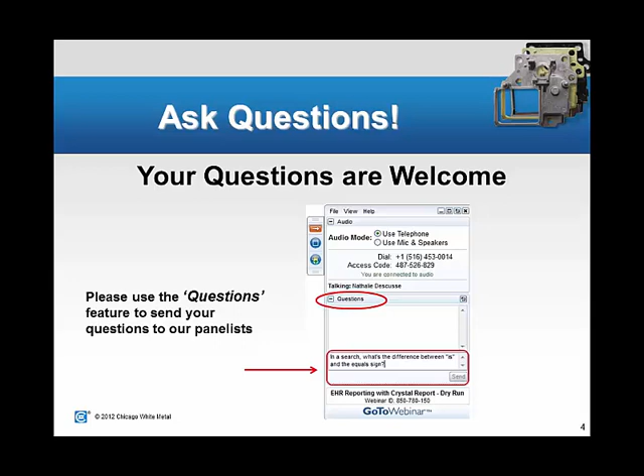So the agenda for today - based on the last webinar we had back in December, a common theme afterward was that a lot of people would like more information on what types of surface finishes are available for die casting. So that's the goal of today's agenda. We'll look at some factors to consider when selecting a finish, and what finish options are available. We won't go over everything - this would take a week to cover all the finishes out there - but we'll talk about some of the more common ones we use regularly, and you can see a comparison of them. We'll look at how part design features might affect the resulting finish, some potential quality issues that result from various finish options, and how Chicago White Metal can help. If there are questions about a type of finish or what might be suitable for your application, let us know, and we'll do our best to help walk you through the best option.

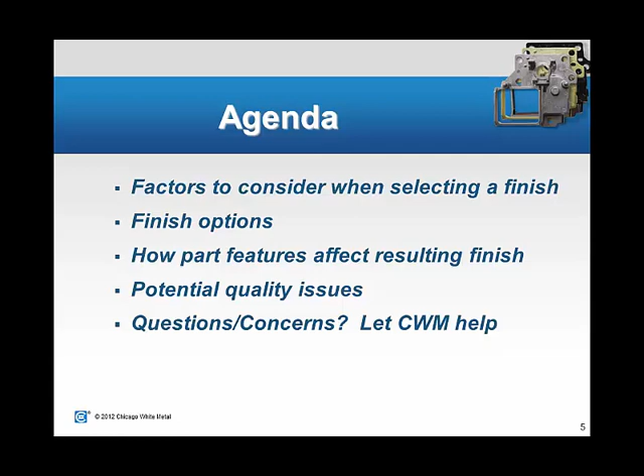Some factors to consider when looking at a finish for a die casting - we have a little catchphrase: start with the finish in mind. Yes, that's a little cheesy, but it's accurate. It's best if we know as much about the finish requirements of a part at the beginning of a project as we can. Many times we'll get into a project and the finish requirements get pushed out, and by the time you're tooled up and ready to go, requirements come in - maybe there's a gate where you wanted a high quality surface - and that's hard to work around when the tool's already built and you're already making parts.

So as much as we know and can work with you ahead of time, it helps the end product that much more. So what are the factors to consider? Cosmetic appearance - is there a specific look you're trying to achieve with your part? Is there a color, a texture, what kind of appearance are you looking for? Part ergonomics - is there a touch factor to your part? Do you need fingerprint resistant coating, a certain amount of texture with your coating? That's another factor to consider. Are there specific corrosion requirements for your application? As we go along, die castings as cast have a certain amount of corrosion protection.

And maybe that is great for some people's applications, but other ones need a higher or maybe a super high level of corrosion resistance. So if you know what your requirements are, let us know, and we can help steer you in a direction. Is there electromagnetic interference or RFI shielding requirements for your application? There are different coating and finish options that help with that. Is your part require a pressure tightness? Is it used as a pressure vessel or going to have a leak test requirement? That's something to consider and let your die caster know as much of that as you can.

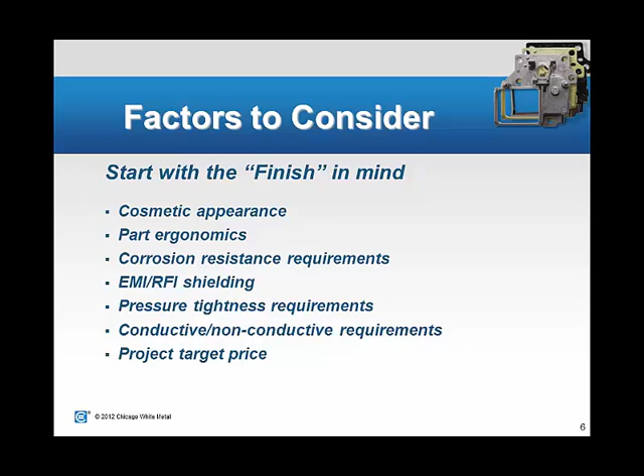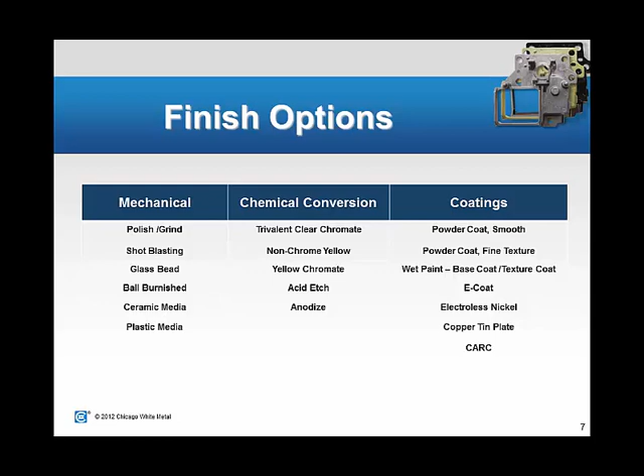Here is just a sampling of the finishes that are available. We try to break it down into categories. We have a mechanical category where parts are vibratory deburred, shot blast, or ball burnished, that type of thing, and we'll cover most of those. Chemical conversion coating, where parts are put in a plating bath and the surface of the die casting is actually converted - the alloy and chemical composition of the surface is converted to make an anodized part or a trivalent clear chromate, that type of thing. We'll talk about those. And what we call final coatings - things typically considered to be a highly cosmetic look, from powder coats to wet paint, all the way through. We don't talk about all these listed here, we just wanted to give a sampling of what's out there. And again, there's many, many more.

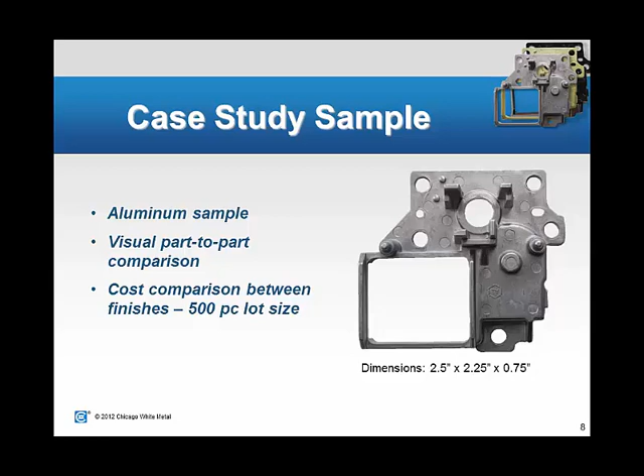One other thing to note is we based all of our pricing in this presentation on a 500-piece lot size. So you'll see in here where there's times we'll say 'with setup, cost with setup.' A larger lot size might end up reducing the overall cost per part, but we tried to keep it consistent - a 500-piece lot size was used in the pricing for all the examples coming up.

So the first section we'll talk about is mechanical finishes. That covers shot blasting, ceramic media, plastic media, ball burnishing, glass bead blasting, and polish and grinding. One of the benefits of all these coatings is that it removes the majority of the flash from an as-cast part - all of these do a great job at that. They also remove any surface imperfections of the casting, so flow marks and swirls that might visually not be what you want - these will even out the surface and give it a better appearance.

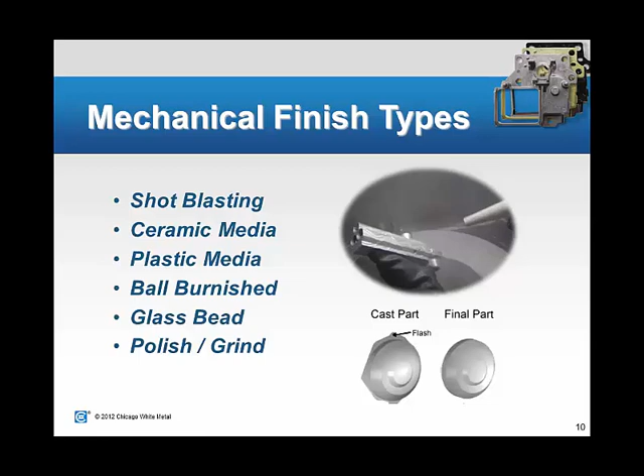These also do a good job of preparation for some of the following coatings that are going to go on. So if the part's going to get a wet paint or powder coat as a final coating, shot blasting or some of the other vibratory deburring operations do a good job of prepping the surface, roughing it up a little bit so that the final coating adheres better.

So here's the first example of a type of mechanical finish: shot blasting. The part pictured here was actually performed using the Wheelabrator process, which should be familiar to a lot of people. It was done with steel shot, and because this part was aluminum, we could do that. We wouldn't recommend steel shot for magnesium or zinc alloys, but this is what we did for aluminum.

So we would consider this a mechanical finish for a non-cosmetic part. It's going to give a nice, even, uniform coverage at a low cost, but we would not consider this a highly cosmetic look. It does help cover imperfections in the surface that I mentioned. Potentially, depending on how aggressive the shot is to the part, you may have scratching or blistering that occurs during the process, so it's something to keep in mind, and your die caster should help control that.

The steel shot is relatively aggressive to the part, so with really tight tolerance features, you may have some issues keeping that tolerance after the process, so that's something to keep in mind. There are various media available. The example shown here was processed with steel shot for the aluminum part, but there are different media options available that will allow us to process magnesium or zinc as well. The cost for this process, at a 500-piece batch size, was 8 cents, with the steel media. That's the bottom line, the baseline that we start with.

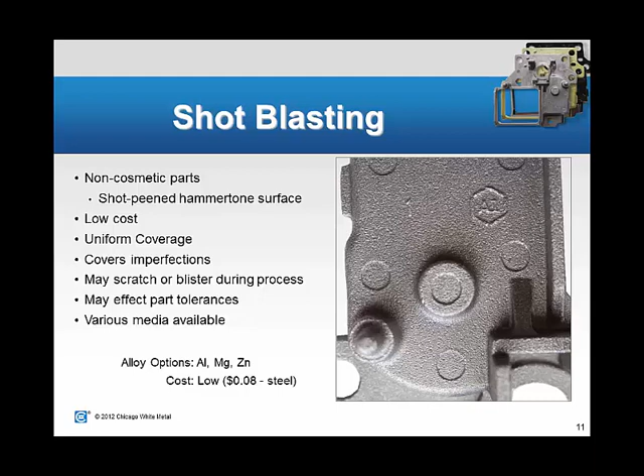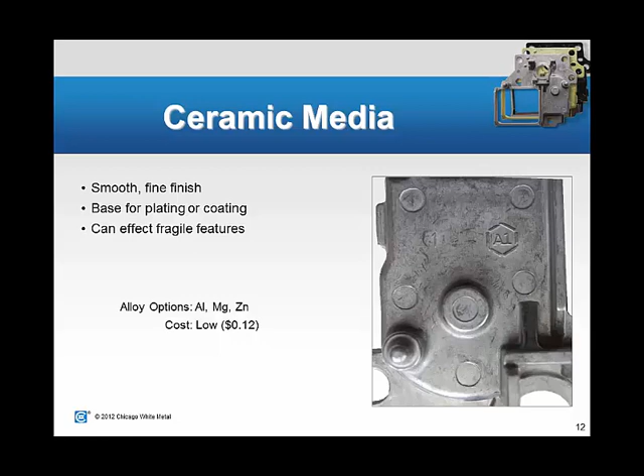Ceramic media. This is a vibratory deburr process where parts are put in bulk into a tub or a large bowl and then vibrated. The interaction between the media and the part is what creates the surface. The ceramic provides a smooth, fine finish, and again it's a very good base for plating or coatings that come later. The ceramic, just like the previous process, can be aggressive to fragile features, so it's something to keep in mind. This can be done with all 3 alloy types, aluminum, magnesium, and zinc, at about a 12-cent cost.

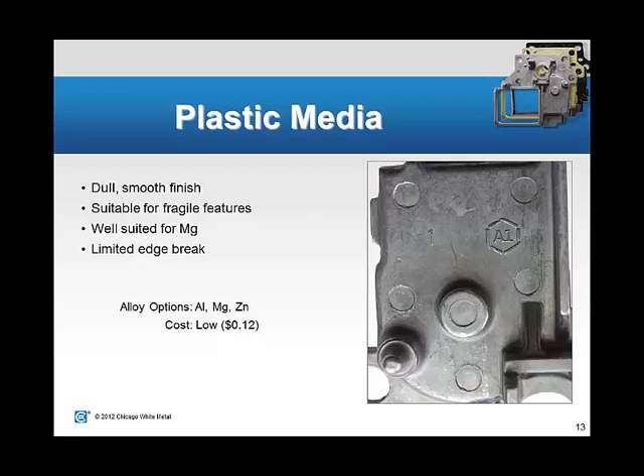The next one we show is plastic media. This is done in the same process, but the media used here is small plastic. The media comes in different sizes and shapes, so you could have balls, cylinders, or triangles. It varies depending on the type of finish you're looking for, and each type gives a different look. This provides a dull, smooth finish. The plastic media is not very aggressive to the part, so it is suitable for fragile features, as well as magnesium, which needs to be handled a little more gently, so plastic is good for that. Because it's not as aggressive, there is limited edge break, so some of the edges and features of the part that require a more significant edge break, plastic media will not give that. Just something to keep in mind. Again, all 3 alloy options are available to be processed this way, again at a 12-cent cost.

Ball burnishing is a very low-budget option for a nice mirror shine. In this process, the metal is actually being worked to get the desired appearance. It definitely helps remove burrs from the part. It does have the highest cost media; there's stainless steel media used in this, and it is a high-cost media. Again, all 3 alloy types are available, and this cost is 30 cents.

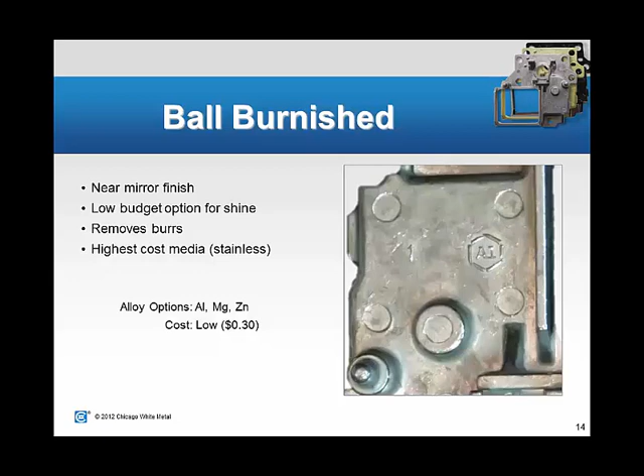Glass bead is another shot blasting type of process. It provides a very smooth, uniform finish and is a good base for final coatings that come later. It is more of a manual process; many times this is done part by part, so the labor content is slightly higher. Because of that, you will have some varied part-to-part and lot-to-lot matching issues potentially, so next time you run it, it may not look exactly like it did before. One of the reasons is the media wears very rapidly, so depending on if it's new media or old media, or where it is in the cycle, the look will come out a little different. All 3 alloy options are available with this process, and we call this a medium cost.

The previous ones were all in our low category. This is the first one for a medium cost, 35 cents.

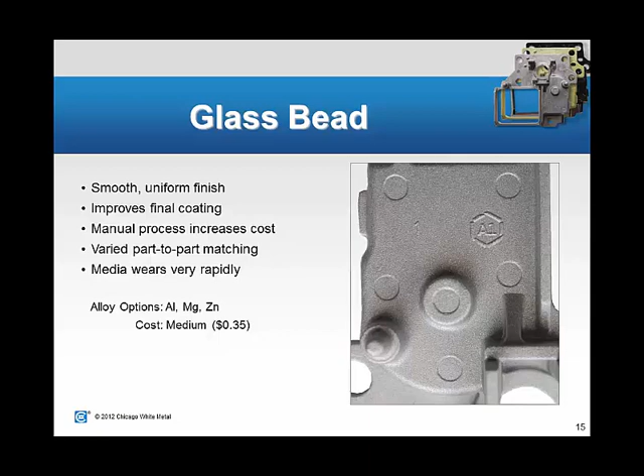Polished parting line - if you look at the image, this is actually the same part, the part below showing mouse marks. You can see on this part a rough edge in this area. That's the gate vestige left over after a part is cast and then die trimmed. You'll have a rough edge where the gate metal flowed into the part, or overflows, or other tooling configurations where metal comes in or out of the part.

For a lot of people, the as-trimmed look is fine, it's not a problem. But if it's a highly cosmetic finish, many times that's not acceptable. Even if you powder coat or wet paint on top of this, the rough area will still show through. It's not like it'll cover up with powder coat or wet paint - it'll still show.

So what we do is, again this is a more manual process, we actually polish the parting line, and the result of that is what's above. The above image shows what happens when you remove that gate vestige, and once a powder or wet paint or another cosmetic finish gets applied, it looks fantastic. You could never tell that there was a gate or any other tooling remnant visible. Again, we would consider this for cosmetic parts.

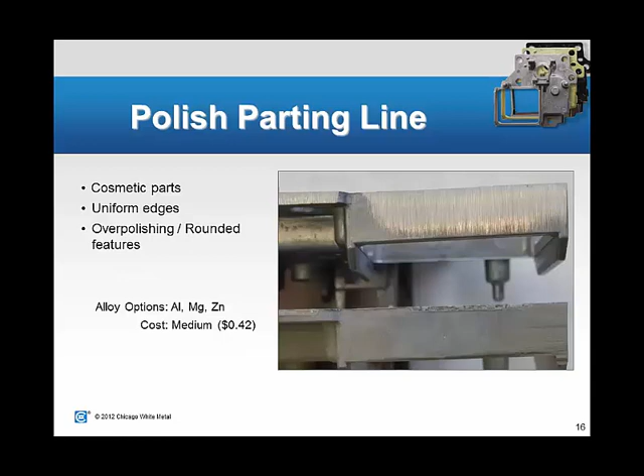We'll now look at some chemical finishes - this is the second category that we looked at. The types we'll cover today are trivalent clear chromate, yellow chromate, anodize, and a non-chrome yellow.

If you see the picture, all these processes are processed in a tank. The parts are either rack plated or potentially bulk plated, processed in a basket and then hung on the racks, which you can sort of make out in the image, and then put through a variety of different baths to achieve the final coating we're trying to do here.

In all of these, like I mentioned before, the chemical makeup of the surface of the die casting is actually being changed. So one of the benefits of these coatings is that there's really no added thickness to the part. So for parts with complex features or tight tolerances, there's basically zero added thickness, which is a good side effect for this type of finish.

All these finishes provide additional corrosion resistance over a raw casting. They also, like the previous batch of options, provide proper surface preparation for any coatings that come after it. Again, we would consider this not a cosmetic finish, but it can be used as a final coating if that's all that's required. Many of our customers do use these options as a final finish.

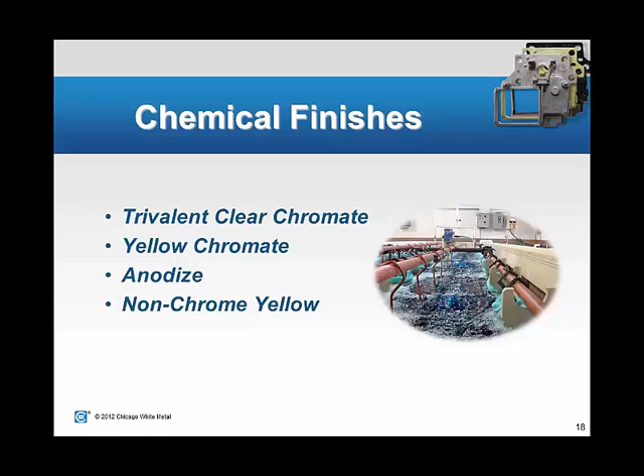The first option we look at is trivalent clear chromate. It has a dull gray appearance, can have a bluish tint at times. It's very inconsistent from batch to batch exactly how the parts come out and look. It does provide excellent coating adhesion for the following finishes that might be applied to this part.

The two things to consider when looking at pretty much all of these bath-plated processes are chromate entrapment and a white powdery residue that can be an issue if the part has blind holes. You can imagine if a part is racked and then lowered into a bath, sometimes blind holes have a hard time receiving the liquid into them, and then a hard time getting that liquid back out. So it's just something to consider. Proper rinsing of the parts after the process will typically alleviate that, but it's just something to consider.

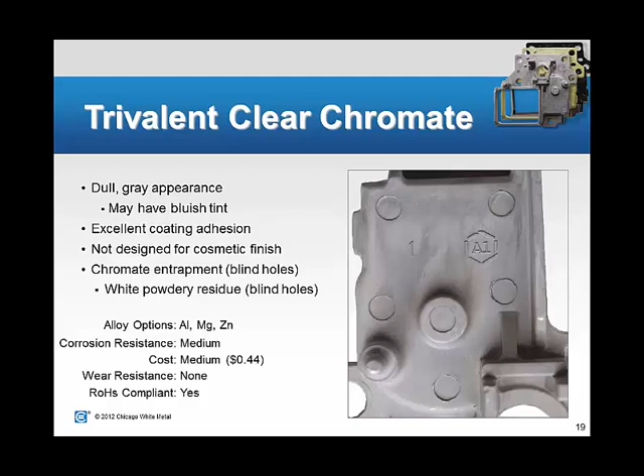Again, all three alloy options are available for this trivalent clear chromate. It provides medium corrosion resistance - this is a relative scale on top of the corrosion resistance that an as-cast part has, so this provides an extra layer, and we would call that medium corrosion resistance. The cost of this is about 44 cents per part. It does not add any wear resistance to the casting, and it is RoHS compliant, which I know is important for many of our customers when looking at reduction of hazardous substances. This complies with that.

The next one we'll look at is a yellow chromate, again processed very similar way. This again varies in color from part to part, batch to batch. We say yellow chromate, but sometimes you'd be hard-pressed to call it yellow. It does improve the adhesion of final finish, and the two blind hole issues that we talked about with the previous slide apply to this as well. Again, all three alloy options, medium corrosion resistance, 44-cent cost, and this one is not RoHS compliant. So this is one to keep in mind with that.

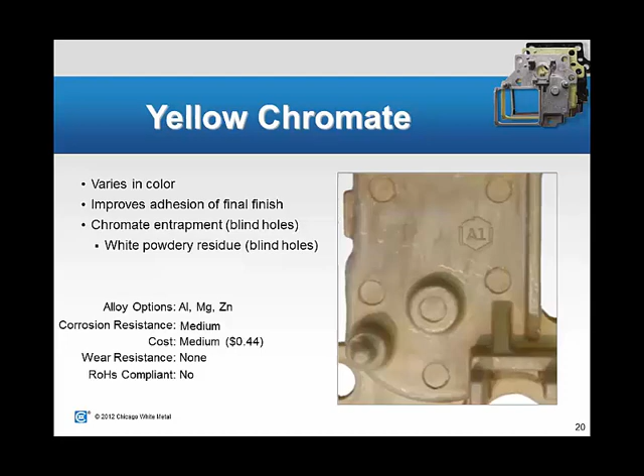If we look at anodizing for die casting, it provides a very low gloss, sometimes matte finish. It comes in clear or black when looking at processing for a die casting. A very non-uniform finish—we would not consider this a cosmetic look. It is very good for tight tolerances because of the minimal thickness applied. It is non-conductive, and again, low film thickness. The options available are aluminum and magnesium. We don't anodize zinc. It offers a medium level of corrosion resistance.

47-cent cost. It does provide some extra wear resistance, so we call that medium, and it is RoHS compliant. There are typically some sealers that are applied to anodizing as a follow-up process. Some of those are not RoHS compliant, so those are things to keep in mind. You just want to make sure that the sealer being used either is or is not what you're looking for.

I'm looking at the questions, and it looks like there's a few coming in about why anodizing on die castings did not look like the anodizing on a machined 6061. That's a very good question, we get that a lot. A lot of people are used to seeing anodizing on machine parts with 6061 or extruded parts, and the finish of an anodized part looking great—nice, shiny, consistent, uniform finish. And then when they see an anodized die casting, it looks nothing like it. What happens is, in the other processes I mentioned—extrusion and 6061 machining or other alloys and machining—those are almost 100% aluminum alloys. The die cast alloy that's being used, 380, 383, 390, 360, all of those, has enough other alloys or chemicals in it to prevent the nice shiny finish that you get with an anodize, especially the presence of silicon. That actually is what's preventing the nice consistent finish.

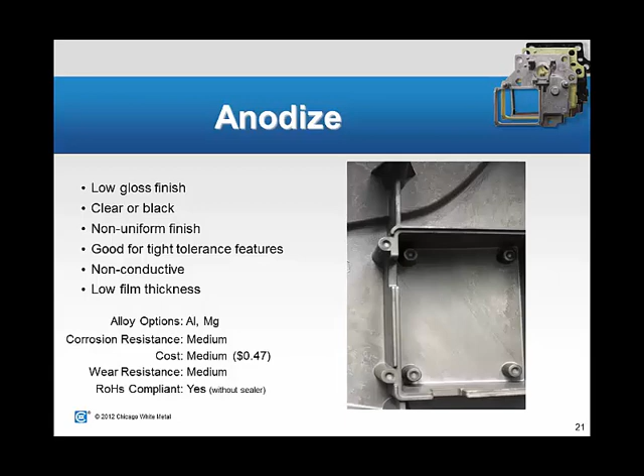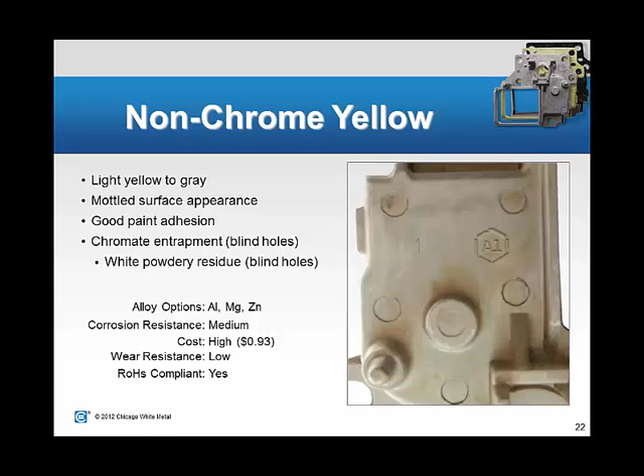The last one in this section is non-chrome yellow. It gives a light gray or yellow appearance, and it can look mottled at times. Again, good for paint adhesion, and the two same concerns with blind holes are in effect for this option as well. All three alloy types are available. Again, medium corrosion resistance, and we would consider this more on the high side, especially of this category of finish, at 93 cents each. It provides a low level of wear resistance, and it is RoHS compliant.

This slide just gives a summary of the three types of chromates. We don't have anodize in here, but it does show visually the differences between the three. It's a little hard to see some of the differences, but you can see the varying shades of appearance that you'll get.

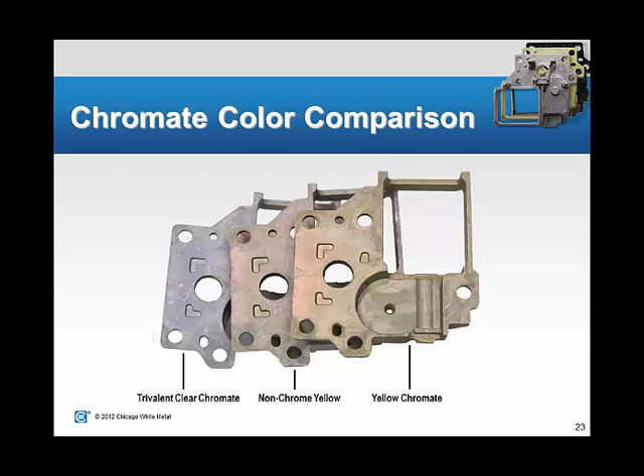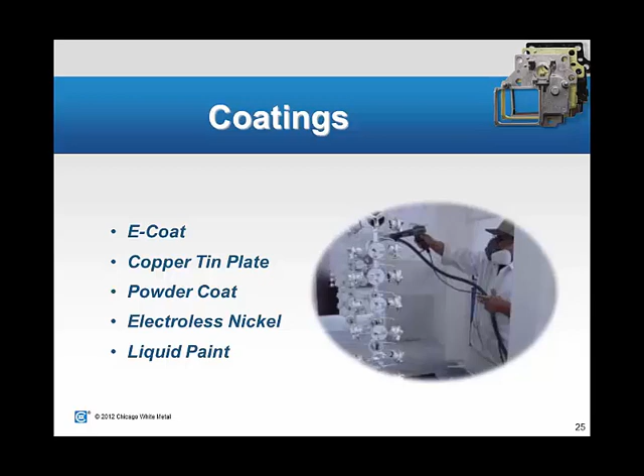Okay, we'll look at the third category of finishes that we talk about, which is coatings, or the final coatings, however you want to say it. These are the options we'll look at: E-coat, copper tin plate, varying types of powder coating, electroless nickel, and liquid or wet paint. These are what we would consider cosmetic coatings, so these are going to give a very high level of cosmetic look to the part.

E-coat is the first one we'll talk about. It provides a black glossy finish—black is overwhelmingly the choice of color for this. There are some other colors being developed for die casting, but they're used very, very little. So 99.9% of the time, you get a black part if you want E-coat. But it does provide a very consistent thickness at 1/1000th or a little under 1/1000th of an inch. Very good for complex designs and part features. This is an insulating finish, so if you're looking for a finish to go on a heat sink or something else, this is probably not what you're going to want, because it would not allow the heat to escape.

The one concern for E-coating, or one of the major concerns, is air pockets. Again, this is done in a bath process, so there is a potential for air pockets to be entrapped underneath the E-coat finish. This process is good for all 3 alloy types: aluminum, mag, and zinc. Provides a very high level of corrosion resistance. Medium cost at 44 cents. Medium level of wear resistance, and it is RoHS compliant.

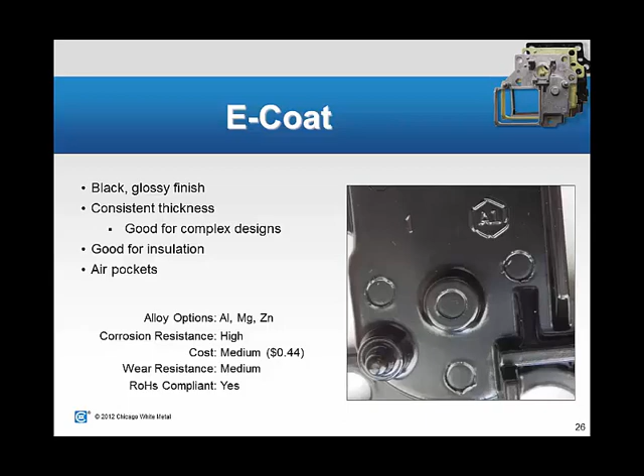The next option we'll look at is copper tin plating. Provides a high glossy finish, and it is solderable. So if it's an application where you have an electrical connector or something else that needs soldering to other parts, this is a very good option. Provides a very uniform finish, good for tight tolerance features. It's a very, very thin layer of thickness that goes onto this.

This is a conductive coating, and it does provide for very good EMI shielding. So if you have parts that are going to act as a device for electronics, this is a good option for protecting the electronics from EMI. We look at aluminum and zinc for this plating type, not magnesium. Provides a medium level of corrosion resistance, medium cost at 70 cents, medium wear resistance, and again, it is RoHS compliant.

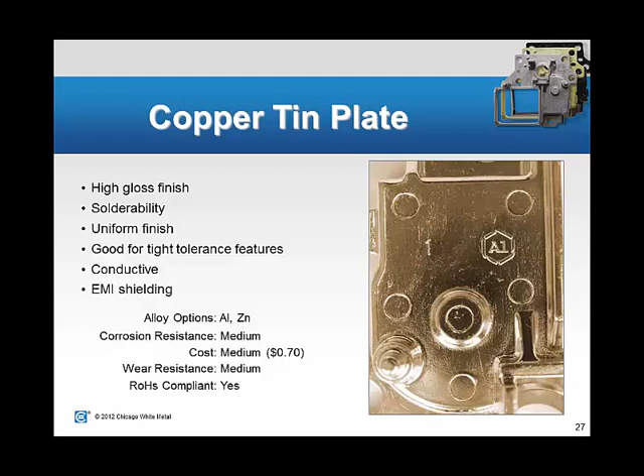Powder coating, that's a very common final finish that we get into with many of our customers. You can see the 2 images of smooth and fine texture. So these are both powder coats shown there, and they come in a variety of textures.

Again, we would consider this a final finish for very cosmetic parts. Very long-lasting and durable option for a finish. Comes in a wide variety of stock colors that a powder coat house might have. You can also do custom colors. With a little time and money, you can develop a custom color to fit another color chip that you have, or match another part in your assembly. So you can develop custom colors.

Uniformity of thickness is a little difficult to maintain. These parts are processed by hanging them on a rack, and the rack and parts are electrostatically charged, which is what attracts the paint or powder when it's applied. So depending on the part configuration, if you have deep features or tall features, you may have a bit of inconsistent thickness depending on the type of feature.

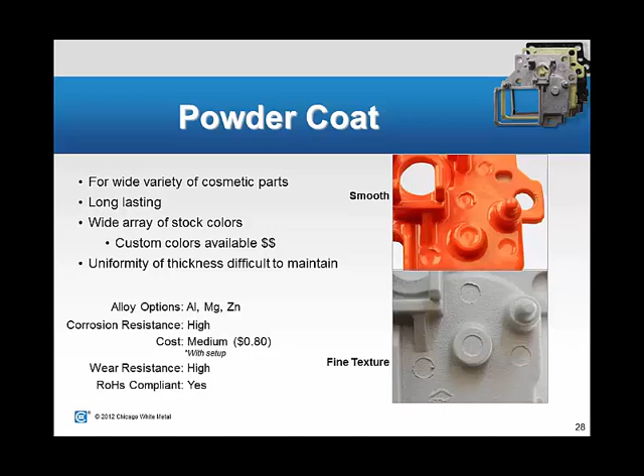One concern to keep in mind with any type of powder coating or wet paint that's applied: the parts are racked during the process, so you have to be cognizant that there will be a rack mark remaining behind. That's something we want to bring up and make sure you talk about with the die caster—finding a good position for that rack mark.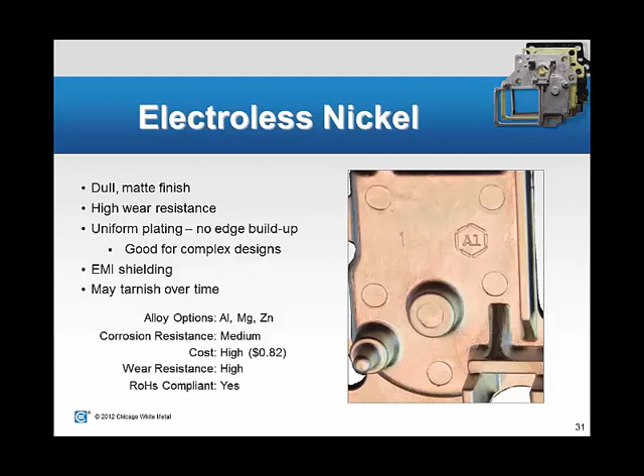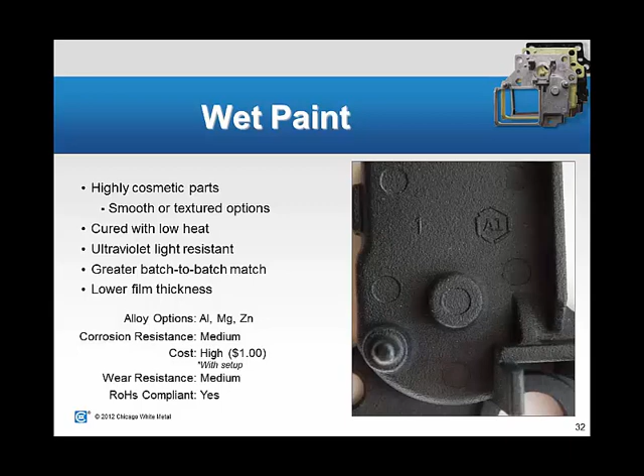It cures with lower amounts of heat, so outgassing with wet paint is not nearly as much of a concern. It has UV light resistance capability, greater batch-to-batch matching, and lower film thickness than powder coating. It's processed on all three alloy types, with a medium level of corrosion resistance, and the same caveat with cost—setup charges were factored in with a 500-piece batch size. It has a medium amount of wear resistance and is RoHS compliant.

A couple of paint issues to look out for: blistering and dust below the surface. Those are typically caused by improper cleanliness of the part prior to the paint being applied, so it's important to work with a house that knows what they're doing as far as surface preparation and getting the part ready to be painted. Sagging typically occurs because too much paint is being applied, or the part is racked in a certain way that causes sagging of the paint.

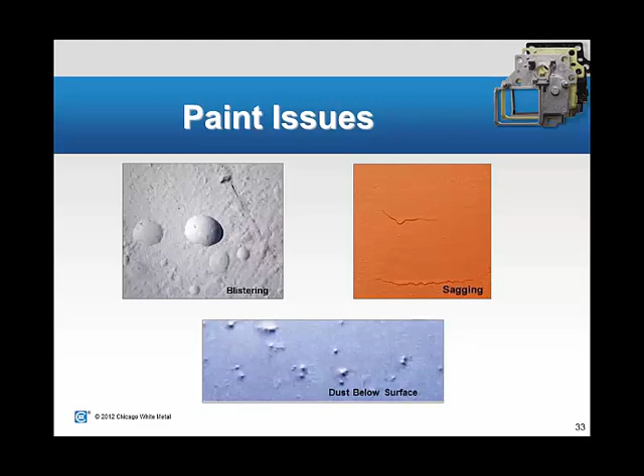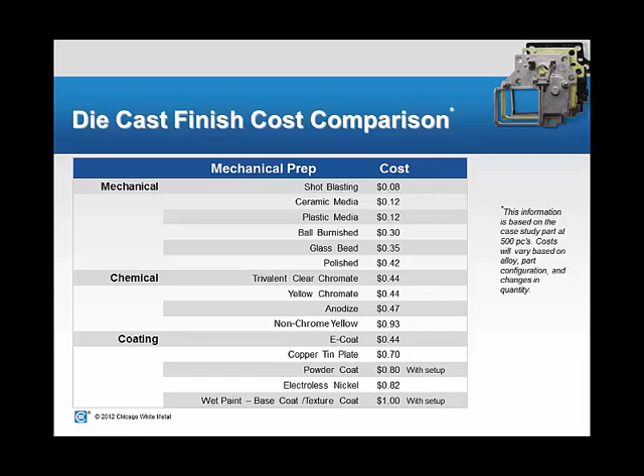This chart gives a summary of what we just talked about. It breaks down all the different options we looked at—the mechanical, chemical, and coating options—and the relative cost. This slide will be provided in a link following the webinar, so you can have a relative indication of costs for each.

The next chart we'll send a link to highlights some additional finish types we use, specifically for magnesium, because our sample part used previously was aluminum. We didn't get into Dow 7, Dow 9, NH35, and other finishes specific to mag, so we wanted to give some information about those as well as other types. Some of these we covered, but some we did not—this chart will also be provided to you.

It gives some indication of the number of salt spray hours you can expect, whether or not it's RoHS compliant, and the type of alloy it's good for. If you look at the different finishes below, I mentioned the various types of anodizing, so we give a couple of other ones here. Again, at the end we'll provide this information.

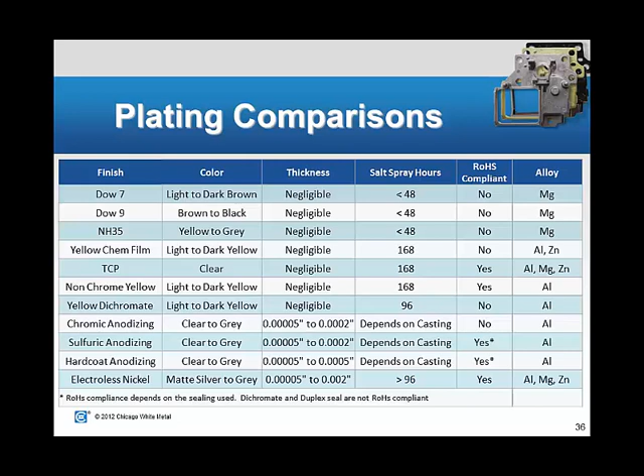If we look at how the part design might affect the final finish, we'll look at some features to take into account: deep recessed holes, which we talked about before, tall exposed features, how a flat surface looks versus a rounded surface, cosmetic concerns, tight tolerance features, masking, and rack points, which we've also talked about before.

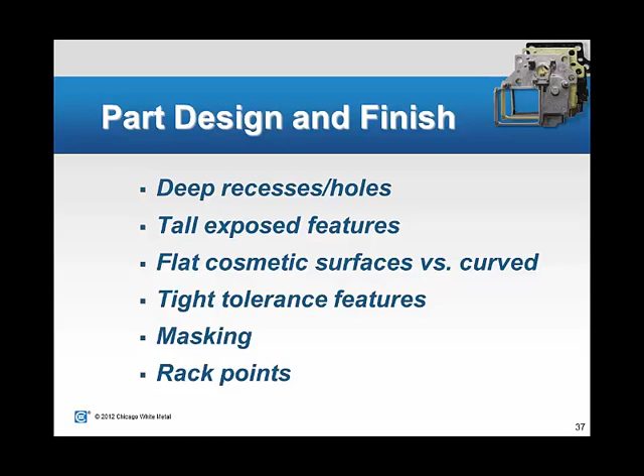The tall exposed features shown here, this is a mounting boss that is relatively tall versus the floor of the part. As mentioned with some finishing options like powder coating, where the part is hung and electrically charged, taller features almost act like a lightning rod, attracting a larger amount of powder or other finish. So that's something to keep in mind, and if a feature can't get a higher level of finish, we might have to mask it.

Masking is the second point we highlight. That's something to definitely keep in mind with features you don't want any paint on, or that have a tight tolerance where you can't accept a thousandths or 2,000ths amount of coating. So we'll mask that feature or area of the part. Many times electrical connector areas, or areas with an O-ring or something else requiring a tight tolerance, will be masked off prior to powder coat or wet paint.

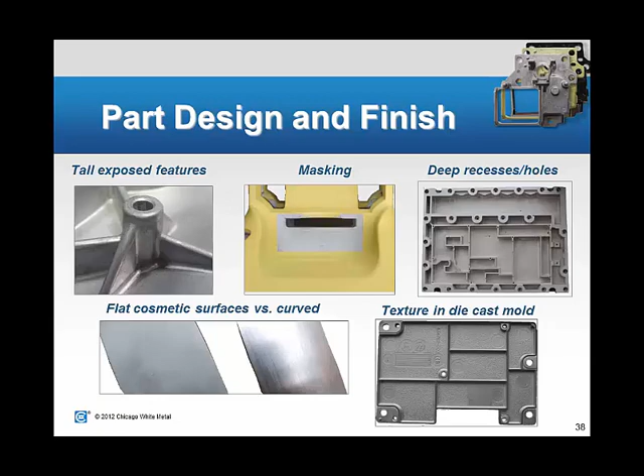Tool design, how a die-cast tool is designed and the resulting finish, we don't talk a lot about here, but it's something to keep in mind. There are things we can do ahead of time in tool design that will affect the part finish. I mentioned in-tool texturing on the previous slide, so that's something to keep in mind.

What Chicago White Metal does is utilize a MagmaSoft flow simulation. We talked a lot about this in the previous webinar done in December, which is on our website—we'll give a link to it at the end. So if you missed that webinar, you can go back and see it again. That MagmaSoft analysis allows us to do several things to try to control some potential issues that could take place with the final finish.

So porosity, outgassing, whether or not it's a pressure tight requirement part—those things, if we know ahead of time, we'll try to take into account during our analysis and design the tool to accommodate it. Also, any areas of the part we might want to gate away from or have no ejector pin locations on. If we know ahead of time certain areas of the part need to be free from those tool features, we'll try to accommodate it.

The last bullet point here is optimizing casting machine size. What we want to stress is you want to make sure the die-cast machine is sized right for the application. If the machine tonnage is just barely large enough for a specific part, the resulting part surface may not look as cosmetically attractive as when a larger machine is used. You want to make sure the tonnage is sized correctly so you can push enough material and pressure to fill the part correctly. If you're just on the borderline of machine size and part size, the resulting finish of the surface might not look like what you want.

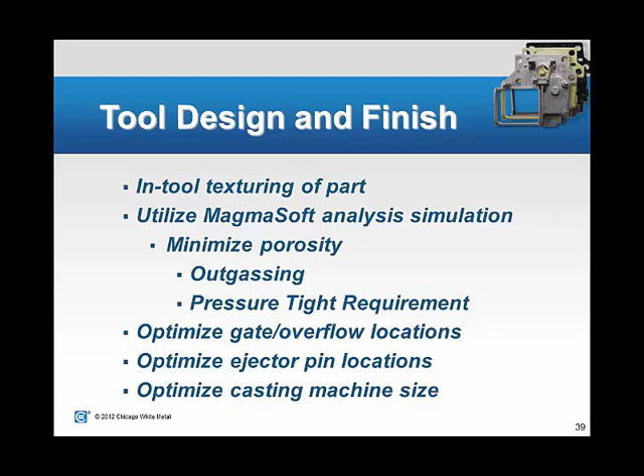So how can Chicago White Metal help? We've been in business 75 years this year, since 1937. We've got a cast of in-house experts on finishing, as well as vendors we've developed across the states. Many of them have been with us for decades to provide a variety of different options you might need. We also have a finishing library in-house, including coupons of the various options, and we have samples and coupons of the majority of the coatings we talked about today, as well as many others. If you have something you want to take a look at before making your mind up, just let us know and we'll try to get you what you need.

We've worked on some of the most highly cosmetic projects in the industry. Again, we've done this for 75 years. We'd never say we've seen everything, but I think we've seen a lot. So please let us know if there's a way we can help.

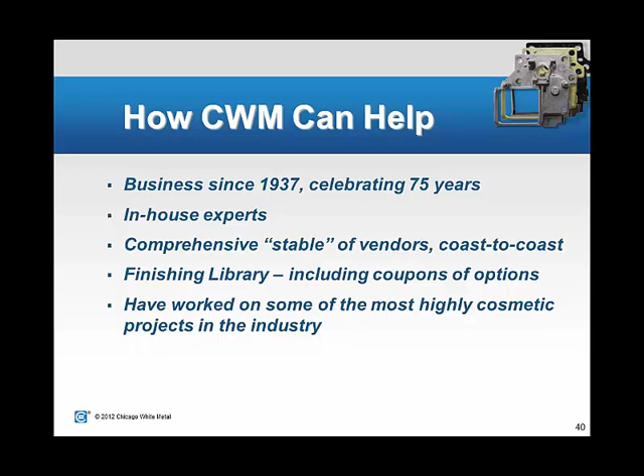The sample coupons I talked about—many years ago, we realized that some of the sampling that was done, or chips available of different finish options, were always done on steel chips or something other than a die casting. So when a customer finally got their real die casting in production, it didn't look the same. So we decided we would build a die ourselves that we could run all 3 alloy types in and make these standardized sized coupons. We send them out, get various coatings, textures, and different finishes applied to them, so we can see exactly how they're going to look on a die casting. It's really a great thing to have, because you do see differences from alloy type to alloy type, and differences between a machined part versus a die casting. It's great to have the real life die cast part available.

Like I mentioned, we have a stock of some of the finishes available now, a wide variety of them. If there's a specific finish you might want to see, let us know—we potentially can have some coupons sent out and made in that. So just let us know what you might need. If there's something you're looking at that you'd like a coupon for, let us know. The follow-up email after the webinar will have details on who to contact for the various coupons.

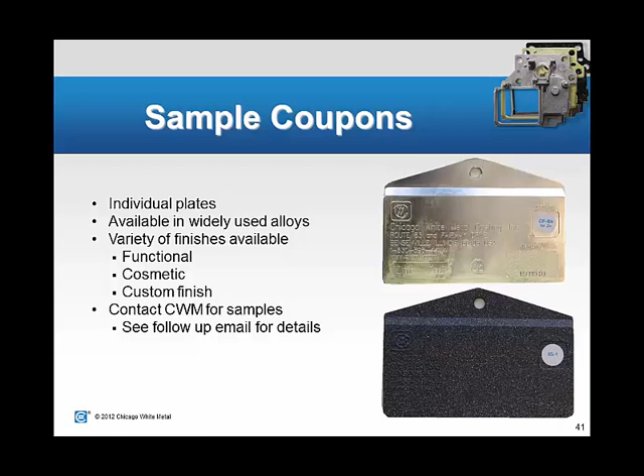Some additional information will be coming out. I made reference to these as we went through—some of the surface finish guides, the various plating comparison charts of cost and different options, and also the information on the coupon request if you need some coupons. Also, we'd invite you to visit the Chicago White Metal Design Center on our website. We have over 70 die-cast technical articles—some finish related, some other topics about die casting—but it's a very nice library to search from. We also have an alloy selection guide, and there's a link to the webinar we did back in December, Product Solutions Through Die Casting. If you weren't able to attend that webinar, I'd invite you to go take a look. It provides more information about general die cast topics, tooling, and how parts are processed, that type of thing.